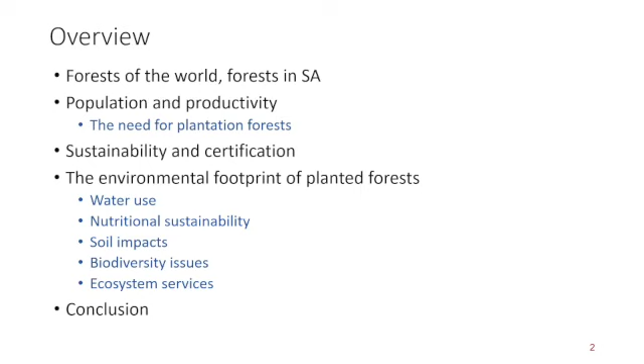I will talk about the forests of the world, particularly then the forests of South Africa, population, productivity issues of different forests, and make out a case for the need for plantation forests. And then I'll go to sustainability and certification as well as the environmental footprint of our planted forests, or plantations as they are known, and then draw a couple of conclusions.

If we start off, the forests of the world, you can see that there's a very large group of forests. Let me just get this pen focused here. Up in the north, there's a very large group of boreal forests, and over here it's known as the taiga.

And these forests grow in the extreme cold climates, mostly coniferous forests. So they are not extremely productive, but they cover a vast area of land on the planet. And then we have our tropical forests, the Amazon, the Congo Basin, West Africa here, Indonesia, etc. And they normally consist of dipterocarp trees, fairly fast growing by natural forest standards, but as we shall see, not all that fast if we don't manage them.

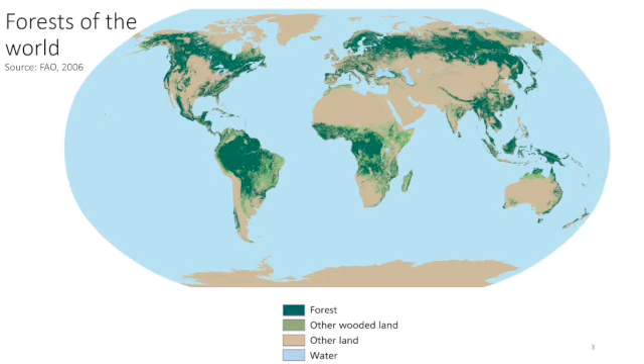If we then move on to southern Africa, maybe I should just point this out, we are very sparsely endowed with forests of a natural kind. These are the biomes we have in South Africa. And as you can see, we have a fair amount of plantation forestry that's been established in this fynbos biome over here. By the way, the purple is the only high forest that we have. And the green here is the savanna forests that we have, the dry bushveld.

But a lot of forests, planted man-made forests, have been put into the fynbos here and along the eastern escarpment of the country into this grassland biome that you can see here. So most of our plantations are then planted into either the fynbos or grassland biome, not into the forest biome, for the very reason that the forest biome is so few and far between and it needs to be conserved.

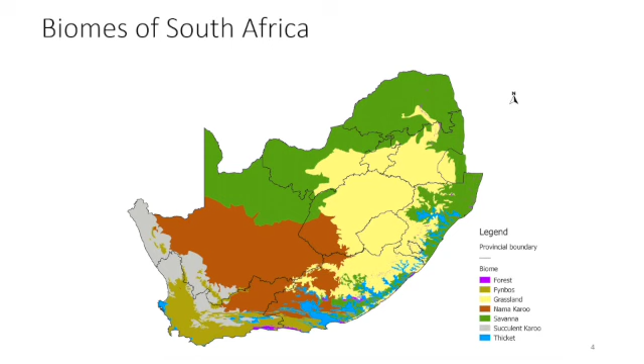So these are the kinds of forests that we then get in South Africa. At the top here, you see the typical savanna. If it gets a bit denser than that, we will call it a bushveld or a woodland. But that's typically what it looks like. There's a grass component, there's a tree component. It's not a continuous cover forest. Over here in the middle, we have the high forests. This picture then taken near Knysna. And that shows you indigenous species in a complete canopy cover situation.

And in the bottom here, you can see a typical pine plantation. Eucalypt plantations don't look all that different, established in a grassveld area in this case, but with very vast areas of grassland in the background here, in the middle ground, that have been left unplanted. Those are our so-called ecological corridors that I will speak about a little bit later.

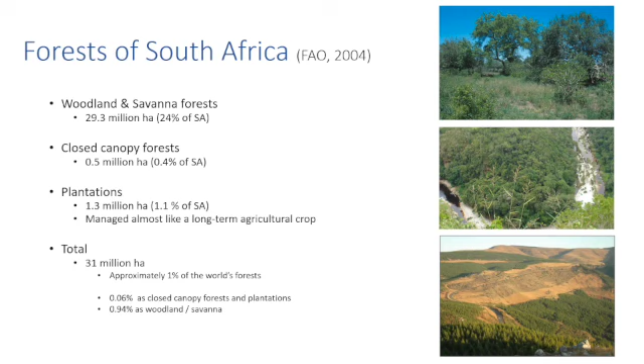So you can see that these middle and bottom categories cover very small areas. It's only the woodlands that cover about 30 million hectares in South Africa. The closed canopy forests of the Southern Cape and the Eastern Escarpment, 500,000 hectares. Plantations, 1.3 million hectares. It's not a lot, but then this is really the bread basket, so to speak, of our industry. Let's call it the fiber basket. So on a world scale, we've got 0.06% of the land area that has closed canopy forests and plantations. And the bulk of that, as you can see, is in woodland and savanna, which mostly supplies things like firewood and fuelwood in our context here.

Then if we go to the forest productivity to serve human needs, as you all know, our population is increasing all the time. And let's just look at a couple of natural forests. If you start with a boreal forest, those very far northern forests, much less than 1 cubic meter of wood is laid down per hectare per annum. If you go to the Tsitsikamma, that number comes a little bit closer to 1, but still a little bit short of 1. If you go to a place like the Amazon, which is the highest productivity, it's about 2 to 5 cubic meters of timber laid on by all the trees collectively in 1 hectare in 1 year.

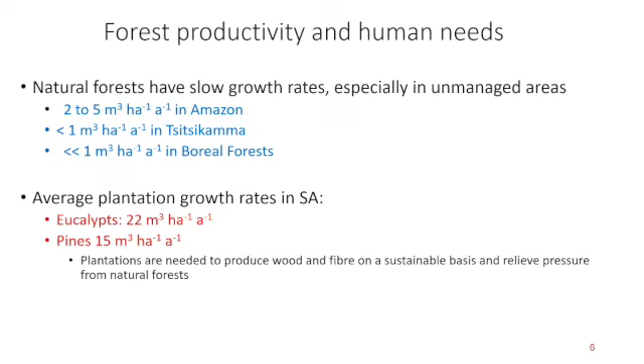If I now put that to you, that the average plantation productivity in South Africa, which is a fairly dry country by international standards, is 22 for eucalyptus and 15 for pines, you can clearly see that it's at least 3 times, and in some cases 10 times as productive as some of these temperate zone natural forests. So we really need the plantations. We need to grow a lot of timber in a very focused and high productivity way. Otherwise, we will need vast areas for it, but we would rather grow it fast on a few small areas, as we are currently doing.

So what would be the reasons for very high plantation productivity? The first thing here is that most of the species came without their natural enemies. That helps a little bit, but it's not everything. Then we've gone and selected the most superior provenances of each species. For example, we would go to Mexico and select the best pines there, and go to Indonesia and Australia and select the best eucalyptus there.

And then even breed them a little bit further in a genetic tree improvement program. And if we then deploy those trees, they grow quite fast because they're the cream of the crop. But not to forget that we farm quite intensively with trees by forest standards. So we do very intensive silviculture.

We prepare the soil, fertilize it a little bit with very low level dosages, but nonetheless we fertilize, as most man-made forests, most indigenous forests are obviously not fertilized. And we match the right species to the right site and the right hybrid to the right site. And then we prune these things, we thin them out when necessary, and we do fuel load management and weed management and so on. So all in all, a fairly intensive silviculture that leads us to a fairly high productivity.

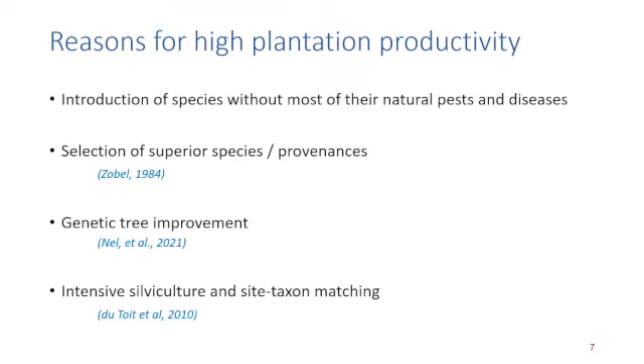And so I think now we need to talk about sustainability. We hear so much in the media about trees having a very negative impact on the environment, and a lot of people like to say a lot of negative things about trees in the popular press, often not substantiated by facts. So let's look at some of the facts around sustainability. When did the concept of sustainability start?

There was a guy in Germany with the name of Carl von Carlowitz. Already in 1713, he introduced this concept of sustained yield. In other words, never to harvest more than what is possible for the forest to regrow in the same period of time. So if you have an annual harvest of X cubic meters of timber per hectare, then that amount of timber must be able to regrow again in that same year. And that made sure that we never depleted the growing stock. So this very firm sustained yield principle was already implemented in the 1700s.

And quite correctly, it makes forestry the first sector in human society to discover and implement the concept of sustainability. Other people did this since the 1970s. So sorry to say this, but forestry did it long before it was cool.

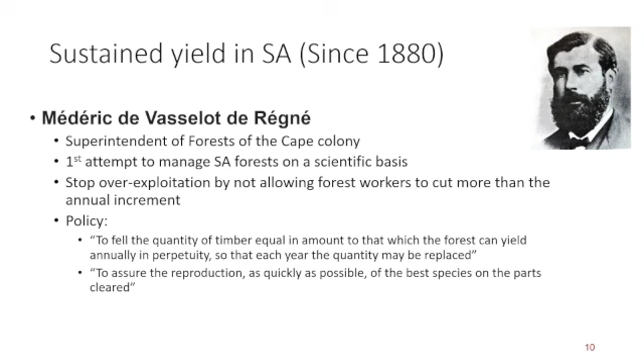Let's just say you're causing erosion in the soil or nutrient depletion, but you just plant a better genotype, you may be able to cover for yourself and not notice that the actual soil upon which your plantation depends is being degraded. So for that reason, we came up with this triple bottom line. We must maintain the environmental quality and the resource base on which it depends. So we cannot unsustainably harvest the forest, but we can also not deplete the soil, pollute the water sources, or mess up the biodiversity completely. We have to look out for all the environmental quality indicators.

Secondly, we have to provide products and services for human needs so that we can enhance the quality of life. And thirdly, it must be economically sustainable and viable. If we meet that triple bottom line, we feel then we are truly sustainable and not just practicing sustained yield. What would make a plantation unsustainable?

If we erode the soil, if we deplete nutrients in the soil or deplete the organic matter contents of the soil so that the biological processes can't happen anymore, if we have very bad environmental impacts, for example, soil compaction or something like that, if we deploy a very weak or inappropriate genetic base, we will open ourselves up to pests and disease attacks, as the next point shows. If we have very poor management, we will drop in productivity, and that will lead to the next point here, which is non-economical performance.

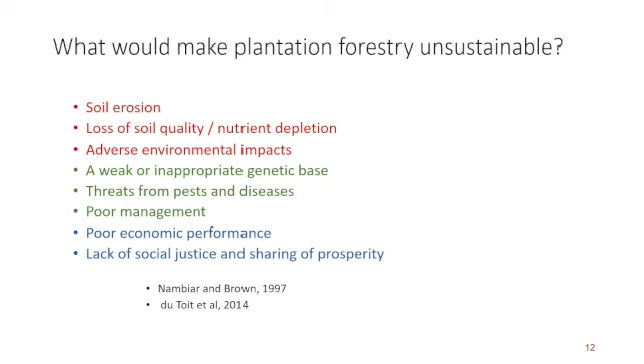And if we exploit people in the process of growing trees, of course, there will be no social justice or sharing of prosperity. And these things all should be avoided. So it's a couple of these myths that forestry is involved in these issues that I would like to dispel today with facts. And that's why I have started this subtitle, to look at plantations and their environmental footprint.

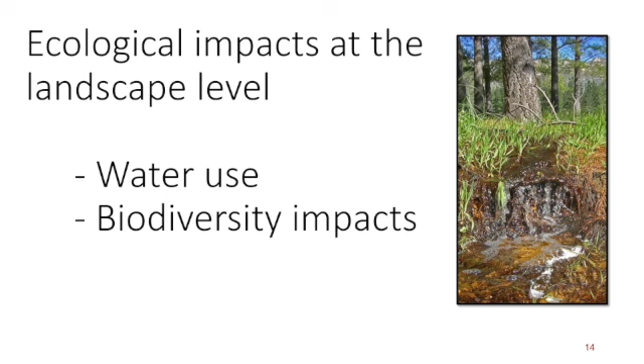So let's just look at things at the landscape level. Several things have to be managed at the landscape level, and one of these would be water use and biodiversity. You cannot just manage that on a compartment level. You need to manage that on the whole landscape level. Let's look at a couple of results that were obtained with modeling plantation water use.

Excuse me for a moment.

That is stream flow reduction patterns caused by afforestation. What people did is they used this Acocks veld type that was known at that time. Now we have Mucina's veld types as well nowadays, but in those days that was the only veld type known. So it was, let's say, a Themeda grassland type of veld type.

They used different soil depths and different soil textures, looked at an area where the stand age is corresponding to the median stream flow reduction, because when a stand is young and you plant it, it uses only a little bit of water. When it gets mature, it uses more water. So they used the median, and they presumed 100% afforestation.

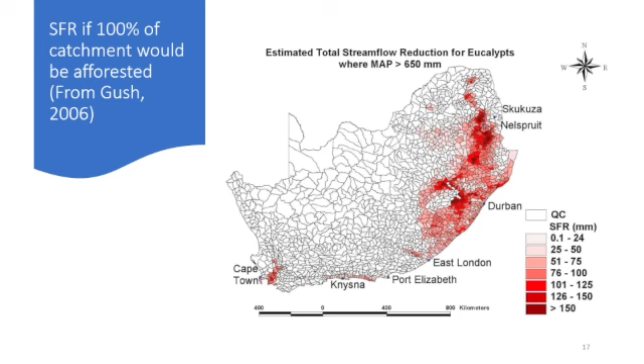Another little piece of very good scientific research that you will never see in the media is the water use efficiency. This was done by Mark Gush and Peter Dye, two very respected scientists working at the time for the CSIR, and they looked at the grams of wood produced per liter of water transpired.

And as you can see here on the right-hand side, we've got several indigenous species that they used as controls. And then all these solid bars over here are plantation species. Now, most of them, pines and eucalyptus, there's quite a variation depending on the provenance, but we usually choose obviously the ones that are more water use efficient in our tree breeding experiments. And so you can see some of these trees use water up to 2 or 3 times more efficiently than most of our indigenous species.

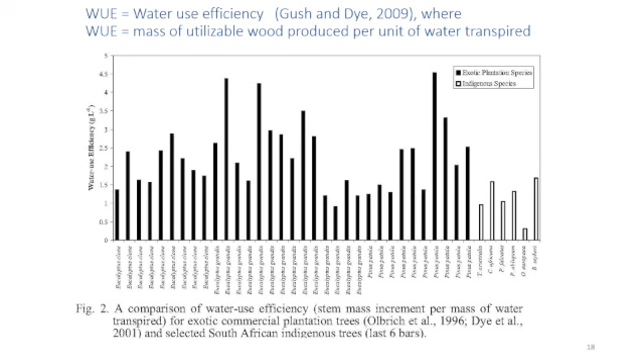So they put on more wood per liter of water transpired than any indigenous species tested to date. So we are getting more bang for our buck by planting these trees because we've selected them like that. We've selected the best provenances, and then we bred them even further to be highly water use efficient. There's no surprises here.

Then what about biodiversity? Is forestry having a very negative impact on biodiversity? The first thing that is very important is that it has to be done at the landscape scale. And the way to do it is with these ecological corridors and ecological networks. In other words, leaving vast areas unplanted, as is shown here. Around this wetland, there's a big node of grassland. There's an afforested patch here.

Then there's another corridor here in the foreground where animals can freely roam, and you can still conserve your biodiversity, even though inside the compartment, you've lost some biodiversity. But on a landscape scale, you've often stayed the same or even gained.

Conservation officials that studied the forestry areas have concluded that these areas inside forest-owned land are refugia for threatened plant and animal species. So definitely because they are well managed, all sorts of poachers and other people who could negatively impact on the ecological quality of this landscape are being kept out. So where there's good management, there's good ecological consequences.

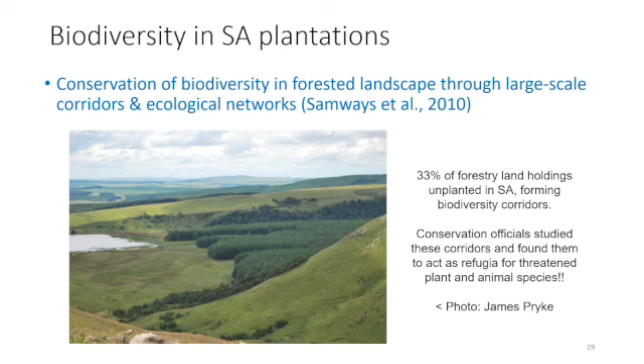About 33% of all forested land in South Africa is actually unplanted. In other words, it keeps the indigenous species. Here you can see some more examples. Around a stream corridor, here in the foreground and in the background, that area has been burnt to also provide niche sites for certain biodiversity areas. Here we've got animals roaming around on these ecological networks. And in some places, Mondi has even got elephants in the plantation.

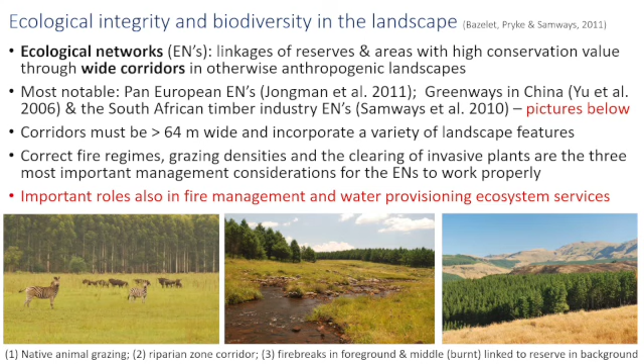So these ecological networks that are linkages between areas of high conservation value are so well recognized that they are counted among the 3 most notable in the world: the Pan-European Ecological Networks, the Greenways in China, and then the South African Timber Industry Ecological Networks, as you can see them here. So we are doing the right thing in terms of conserving biodiversity in forestry.

What about invasiveness? And here it is important that we look at 2 different issues. Invasive trees that were brought in to stabilize the drift sands at the top here. This has got nothing to do with forestry. This was a conservation operation. A lot of these Australian acacias were brought in that could fix atmospheric nitrogen and seed themselves. They have become a pest.

But the good news is that with biological control, almost all of them have now been brought under control. With biocontrol, I mean they have imported pests and diseases that predate the seeds and attack these trees so that they don't spread so much seed anymore. So slowly this battle is being won.

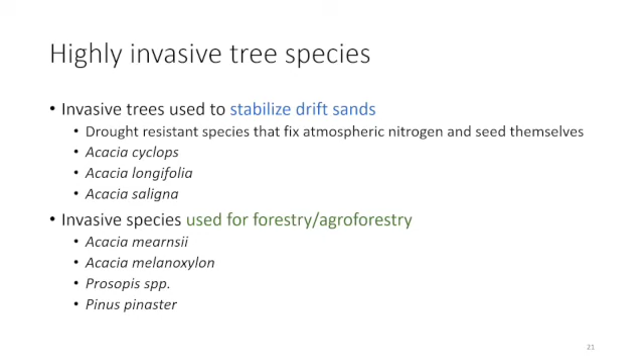What about the invasive species that we still use in forestry and agroforestry? There's a couple of them here. To give you some examples: Pinus pinaster, nobody's planting it near boundary lines anymore, again, to limit the spread of it. People are working very hard to breed sterile wattle at the moment, and so we can continue. There's a biocontrol for prosopis species. There's a biocontrol for these acacias. So we are making very great strides there.

And by doing so, we are creating a whole lot of growing stock that have very low reproduction potential, because if you plant them as a clone, if they do cross-pollinate each other, which they sometimes do, it's almost the same as self-pollination, because a single clone has got the same genetic material, and that means that they become very quickly inbred if you want to plant their own seeds.

If you want a new hybrid, you actually got to go to the good populations, cross the right mother with the right father, and propagate that vegetatively again. So now humans are in control. They can't spread themselves anymore. So that is a really big deal in terms of combating invasiveness.

And some of the species that were moderately invasive have now been phased out mostly. For example, Pinus patula. SAPPI completely stopped planting Pinus patula 3 years ago. They're only planting the Pinus patula by tecunumanii hybrid. And it grows much better, and it's not invasive. And so we can continue. There's several eucalyptus hybrids and so on. And of course, there's these biocontrol imports that also made a big difference.

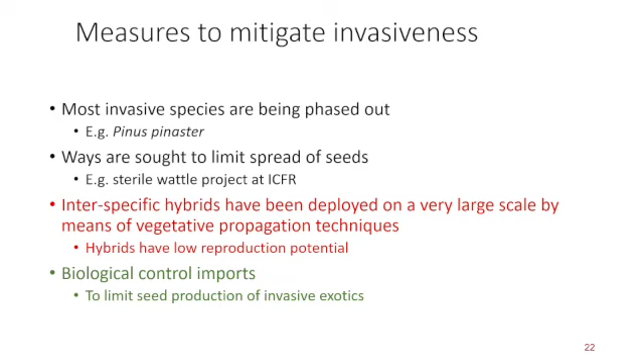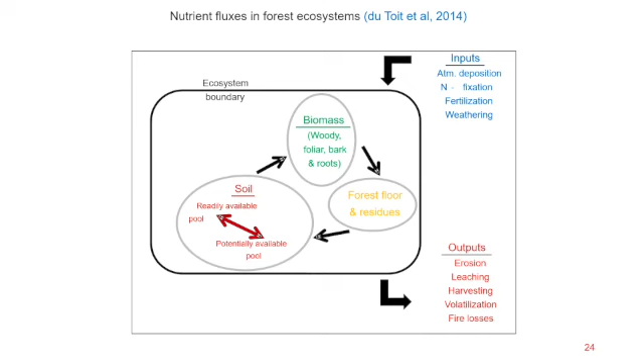So then, without laboring that fact too much, let's just look at some effects at the site level. What about nutritional sustainability and soil conservation? I did quite a lot of work on this, looking at all the inputs and outputs into an ecosystem and then how the nutrients move around in the ecosystem, followed the nutrient fluxes, made a sum of everything coming in, everything going out, and then looking at this readily available pool to see if we plot the net loss as a fraction of the available pool, what will happen. And these are the numbers I got.

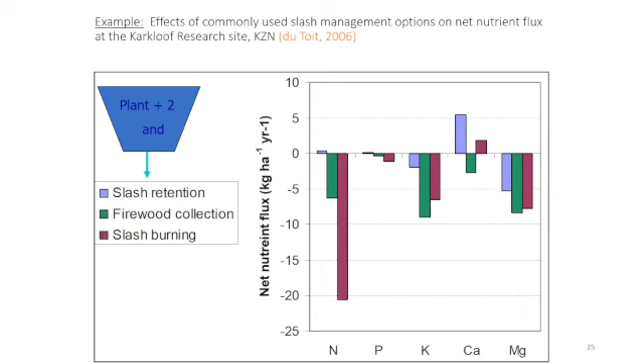More importantly is that we have gone to many sites, 28 pine and 21 eucs to be precise, and we worked out this index of nutritional sustainability that I came up with, which is the net annual nutrient loss. That's the difference between that input and output fractions, divided by the nutrient pool, and in this case, it's the readily available nutrient pool. We've shown that the pINS value then comes up, and that P is, of course, the same as the P in pH. It's a negative logarithm. So if we get values of between 1.6 and 1.8, that means we are losing as little as 1/40th or 1/60th of the readily available nutrient pool. That's not much. And remember, that pool is constantly being replenished by weathering. So it's not something to worry about.

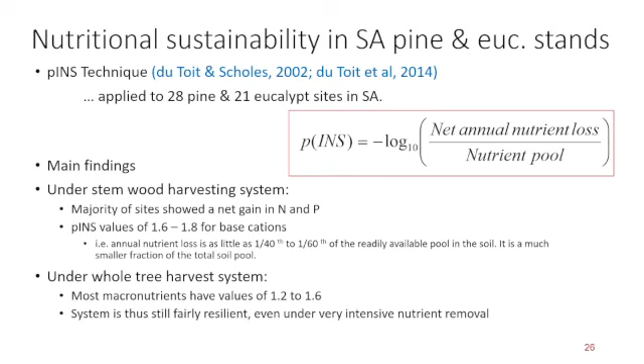Even if we do whole tree harvesting, we cannot get these systems to crash. We've got a couple of experiments that Stephen Dovey started at the ICFR, where we literally milk the nutrients off the site by doing very aggressive harvesting on an annual basis. And we could not get a single site to crash in terms of nutrient depletion. So if we manage it 10 times more intensively than we currently do, we still cannot crash it. I think you get the idea that we are not going to run out of nutrients anytime soon.

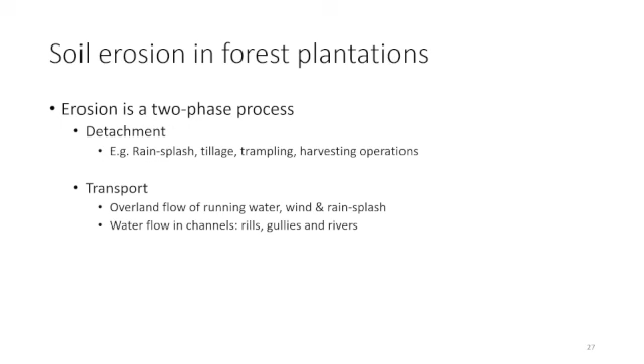The last thing, what about soil erosion? Soil erosion happens in 2 phases. First of all, you've got to detach the soil particles from each other, and that happens through the rain splash, tillage, or trampling or harvesting operations. And then you've got to transport it using wind, water, or rain splash. And then it can collect in these channels, rills, gullies, and eventually go into the river or in the ocean. Eventually. So let us just look at this very interesting work by Morgan in the UK, who did this work on various conservation practices, mostly in agriculture, to prevent both detachment and transport phases of erosion.

The only time that it doesn't cover it is if you, as the manager, literally disturb it by either burning it or raking it up or doing something silly like that, which is not the status quo everywhere. It is just done in exceptional circumstances. So most of the time we have extremely good protection against erosion, much more than agricultural people would ever have. So they are pretty jealous of our situations. If we just look after our forest floor, erosion should look after itself.

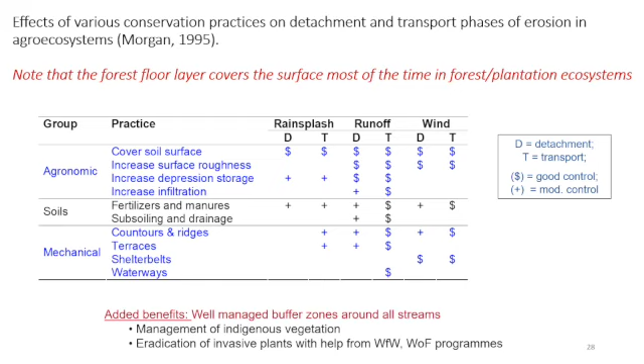So in summary, can we really afford not to have plantations? We have more and more fiber and wood material needs in the world. We have a need for carbon sequestration, and we cannot just burn fossil fuels and use energy-intensive materials all the time. Some people will say we have big impacts in forestry, but I ask you, is the stream flow reduction so bad? Well, actually it isn't. It's about 4% on average. Coupled to the fact that the plantation trees give us the biggest bang for our buck in terms of water use efficiency, I think we should continue with this situation.

In the right place. Of course, we're not going to plant trees in a place where there's a water scarce environment, but in the right places where we do have water available, we can use it very efficiently with plantations. We're having a change to non-invasive species and hybrids, and that is a game changer for that particular point. So I don't think we are going to have that many problems going forward. We use very conservative amounts of nutrients and then, of course, very little erosion. So I think to sum up, there are very few impacts. We can hardly call them impacts.

The major benefits that we can get from forests are listed here. And it goes from jobs, money, community upliftment, recreation and human well-being, climate change mitigation, and adaptation as well, erosion control, good urban interfaces. Everybody wants to go and walk or ride their bicycle or walk their dog under trees rather than in the open sunlight. We need renewable energy sources, and that forests can provide. Very good riparian zone management, again, because there is management present on these lands where forestry happens. The people who manage the forest also manage the natural areas.

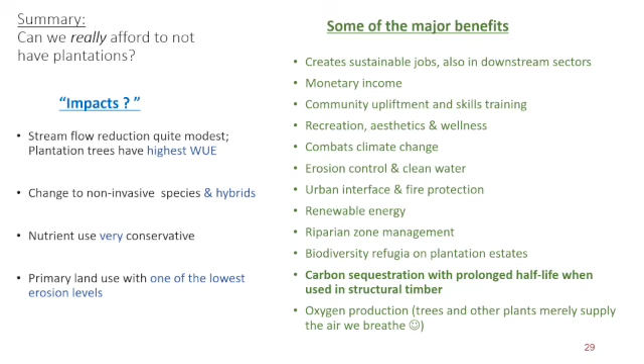As we've seen, we've got several biodiversity refugia on our plantation estates, and probably the most important one, carbon sequestration, which if we put it into structural timber and things like that, it prolongs the half-life of the time that carbon is sequestered, and that makes a very big difference in terms of bringing down carbon dioxide levels in the atmosphere. And I think lastly, it's sort of only supplies the air that we breathe from trees. So I don't think really there's a case to be made out not to have trees.

And then to conclude, the scientific facts show us that trees can be grown sustainably. It's not quite true what the popular media sometimes tell you, that trees are so terrible and they guzzle up all the water and deplete the soil of nutrients. That's simply untruthful. People are managing forests with very strict sustainability criteria in mind. And we are training young foresters to uphold this tradition. But you guys, the architects, giving instructions to the contractors, you will do very well to use more timber from sustainably grown wood and wood products from Southern African plantations, because that will be very good for our country and very good for our environment.

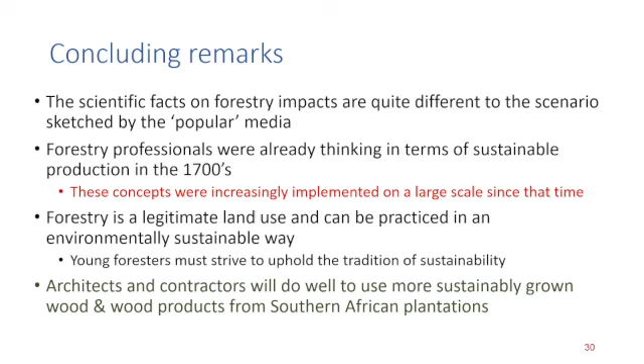I'm coming from a slightly different angle. I'm picking up from Ben, being a practicing engineer and architect in the industry. I'm going to try and tackle a different story, or build on that story, the practicality of doing this. And what does it really mean? And what I understand from architects is it's a very difficult product to sometimes sell to your client. And we want to have a look at that. What are some of the basics? What is the toolkit that you should have on your desk to help you argue and to motivate for the material?

So in doing that, I've divided the talk into 5 parts. Just a brief CO2 update of where we are, a materials overview, because we need to have a look at what materials are we using in the industry and how do we unpack all of the negative press that timber gets in South Africa, and how do we shift to more bio-based construction materials, using SA-grown timber. I'll pick up from what Ben did. And then I'll just close with some case studies, as myself in practice, what I've tested or where I've advised others to test different ways of what we can do with South African timber.

So I want you to hold this lens at all times as a consultant, that there are the 3 legs of environmental sustainability. I'm not talking about economic or social sustainability, but the 3 legs of environmental sustainability are pollution, resource depletion, biodiversity reduction. So running into the new millennium, we need to remain cognizant of those three impacts on the planet at all times, and that any action we do mitigates or has as little negative effect. In fact, we're wanting to move towards a more positive effect on the environment.

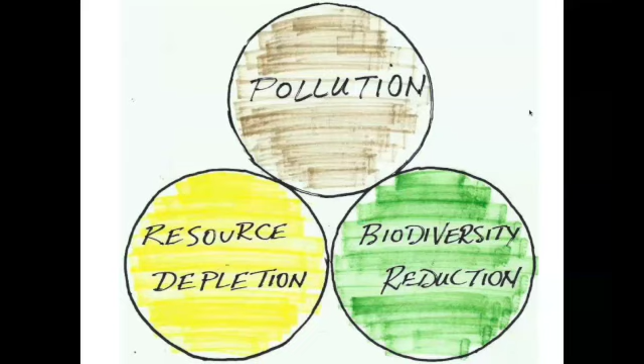And quite simply, for architects and engineers, every time you write on your drawings, you write a specification, everything we do turns into a mini economy. It affects the economy, and how we specify will affect those three things. The big one on the topic is pollution, carbon dioxide and methane in the atmosphere. But we mustn't lose sight of the other two, resource depletion and biodiversity reduction. And Ben covered that very succinctly in the previous talk. So this is a little picture, a graph.

And as life developed in the oceans, life pulled that carbon out of the atmosphere, right down to 300 million years ago, that's the Carboniferous, and it did it in two ways. So all life pulled carbon out of the atmosphere, but the biggest one was the life in the oceans, and the shallow seas were warm, they were teeming with life. They pulled out all the CO2, added it to calcium to form calcium carbonate, and 80% of the world's fossil carbon is stored in limestone. That's 80%, and the other 20% is in fossil fuels.

Now, South Africa, we don't have a huge amount of limestone, but what we're doing at the moment is we are digging out limestone and we fire it to make cement. So 60% of the CO2 that goes up in the production of cement is from the firing of limestone. It's fossil CO2. So that's why cement lime products, if you add lime to cement products, you're getting over 10% of the global carbon footprint, which is large. Interesting, animals made this product. So if you specify marble, because marble comes from limestone, it's compressed and transformed, you're actually using a fossil product.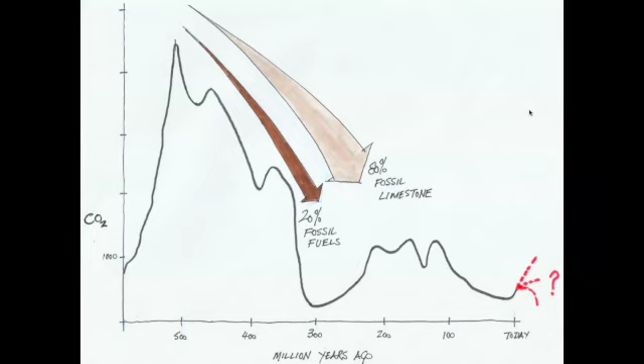The next question is material overview. Materials can only come from two parts. Materials are either mined and processed, or they're grown and processed. So everything around you, in the room around you, whatever we build, it's either mined, dug out the ground and processed, or it's grown and processed. That's it. So that's where we are sitting at the moment. And as a designer, always ask yourself that question. What am I actually using, and where does this come from?

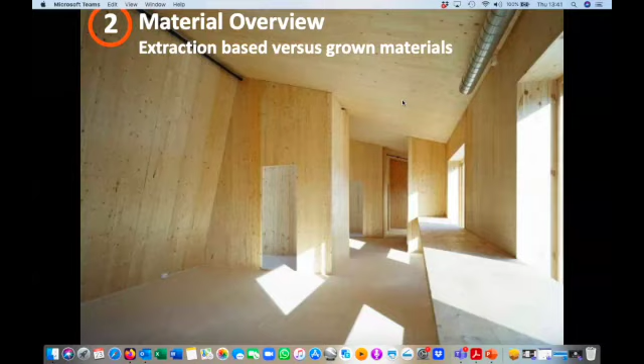No. Oopsie. Sorry, I've got lost here a bit.

Our population is going to go up to, they say, 9 billion, maybe just over 9 billion by 2040. But the problem is the growth of megacities, and Africa and Asia is the problem. So with these megacities, at the moment it's business as usual. 99% of buildings are still being made like they were in the last century. And the whole system of how we teach and do things from the last century prevails. And the philosophy of the last century was the planet has no limits. The new paradigm we're in is the planet has limits, and that's where the biomaterials come into being. So that's not a good graph.

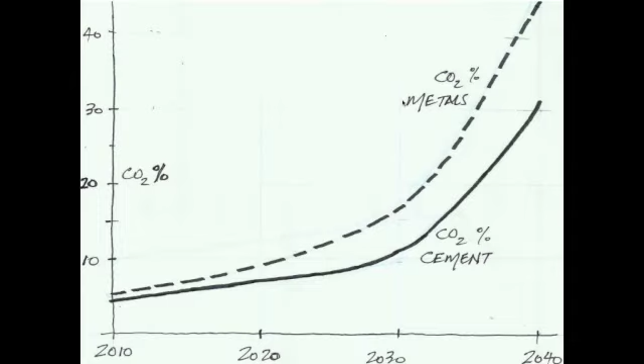I have to add, there's a lot of new technologies coming. This all depends, and this is with what we know now. There's some remarkable technologies in carbon capture. There's some green energies coming out. We don't know where we are, but this is where we are now, and those curves are plotted on that assumption. Hopefully something can happen. Technology can come in, but this is where I think trees can do a huge part. Some figures say that trees can help between 20 and 25% of reducing that curve. So as a designer, sitting at a desk, it's important to have these 5 materials under your belt.

And if we have a look at it, we've got concrete, and this is a comparison of the kilograms of CO2 per ton of material. That's the metric. So if you have a look at that, the highest one there is aluminium. And I won't go into why aluminium is so high, but aluminium is massive. Then steel is down at 1500. We've got concrete at 850, and then clay bricks doesn't look too bad. And I put plantation at 0 if that timber that is cut and used is kept and we measure the carbon stored.

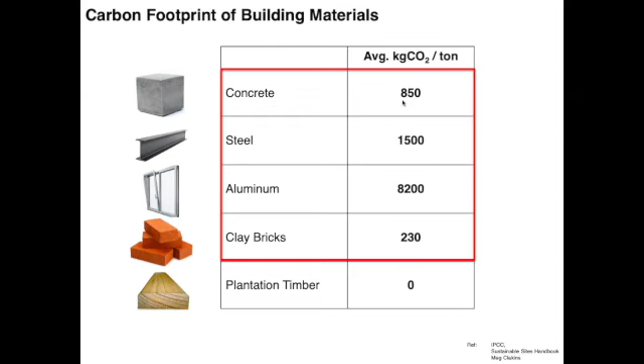Now, when you look at that, you think, okay, avoid aluminium, definitely steel. Let's see what we can do. Concrete, concrete's quite high. Let's build with clay bricks, plantation timber. In engineering, metrics tell a different story. And I'm going to swing the metrics, and we're going to have a look at these mined and processed materials. Those are the ones within the red block versus grown materials.

And I just did an exercise on a simple single-story garage. It's made of clay bricks, plastered, metal roller shutter door for the garage, aluminium windows. Your standard little garage, with just conventional materials we'd all use. Now, if you measure the CO2 of these materials in use, the whole pie chart changes completely. 50% of the CO2 of that building is from the clay brick walls, 25% from cement products and 25% from metal products.

So immediately that gets you to think. The overall carbon footprint of that little garage there is 7,500 kilograms of CO2, and that's 30 car trips from Cape Town to Lusaka in an old Toyota. So looking at that all of a sudden tells a different story. If that's timber frame, we can make major differences to that. So I'll leave you with that drawing for you to think about as we move on.

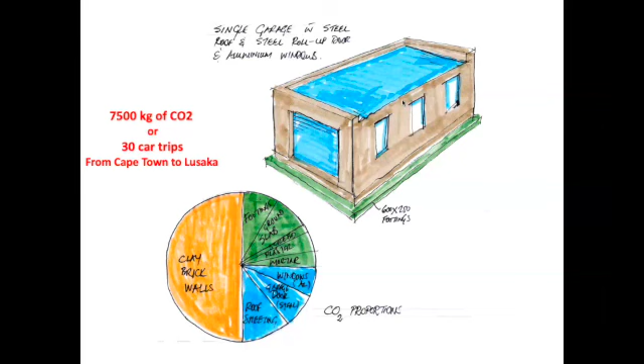So what we're facing is South Africa has a reinforced concrete, masonry, steel culture. I don't have any problem with those materials. I love them. I love using them. But right now, where we are on the planet, given that the construction industry contributes about 40% to the total global footprint, I think we've got to do something. And given the new IPCC reports, which were shocking, we've got a duty to sharpen our pencil, think twice, and adopt and adapt how we speak to our clients

and who we really represent. The concept of the client has changed. The client is no longer that person. In fact, the client is the planet, because if we don't serve that client, then we will have nothing left. So I think the days of the client saying, I want a copper roof, I want big aluminium, need to be challenged. We no longer have that luxury.

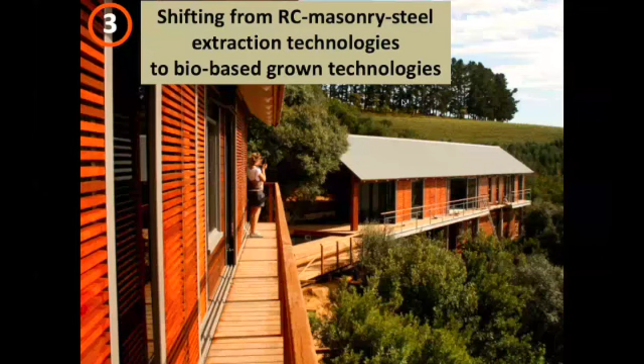So the shift would be from this masonry, steel, RC technology to bio-based grown technologies. And why I say that is because timber is the main one in South Africa, and I think there are others like bamboo that could be used. So that's the big shift. So what are some of the things? How are we going to achieve this? How do we develop this?

We already have a very small cottage industry timber culture in South Africa. There is some timber framing here and there. What's really the problem? In my work with Brunt and with Ben, South Africa could produce enough timber for a good percentage of housing in South African buildings. But it quite simply comes down to the fact that we are a reinforced concrete, steel and brick culture.

That's all. When I was in Connecticut and I went to speak to contractors and met them on site, I said, how do you guys feel about building a concrete or brick structure? And they had the same response as if you asked a brick builder here. They just don't know the material. All they know is timber. So we don't know timber.

There are some who've made timber a special interest, but the dedicated understanding of the material isn't there at all, like for reinforced concrete or steel. As an engineer, I know if you go to any reinforced concrete engineer, he or she will know everything on how to specify, all the ins and outs, all the nuances and all the problems of concrete. And concrete has got the same percentage of problems as timber has, and so has steel.

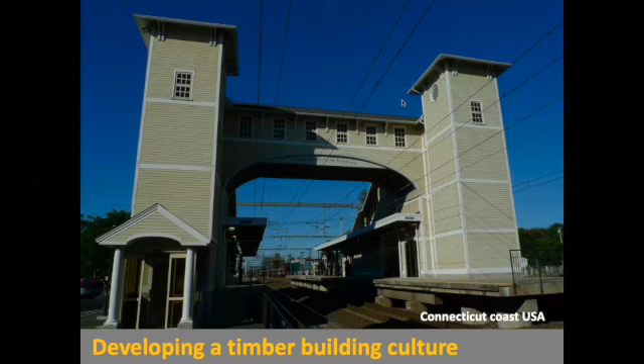A little bit more then to pick up from Ben. Lots of doubt. I mean, many engineers and architects with lots of doubt around the material. How is SA pine and how good is it? Well, it depends. There's lots of different types of SA pine, and it depends how it's been prepared, how it's been selected, how it's been treated.

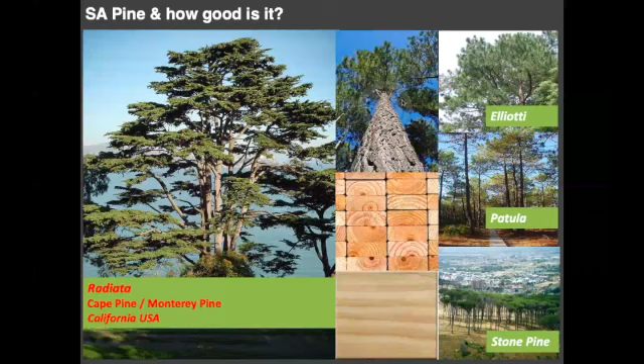That all works. But I can tell you, and I'll show my examples, I have not really had a problem with SA pine. But the knowledge around how to select and treat and design it appropriately, I would think, needs work. Eucalyptus, how good is it? And I'll show you the examples. I think we've got two fantastic materials here, and it's enough, I think, for us to do what we need to do.

At all costs, I think, if you're going to use any imported timber, I would only use it probably from the northern forests where there are sustainable plantations, in the Baltic areas and Canada and areas like that, where they have massive, big natural forests, and they replant them.

So they're in their natural environment, and they are managed sustainable natural forests, stroke plantation forests, whereas our South African ones are completely aliens, which have been managed unbelievably well. But I think that we have excellent timber, and if we go into hybrids, we will have all that we need.

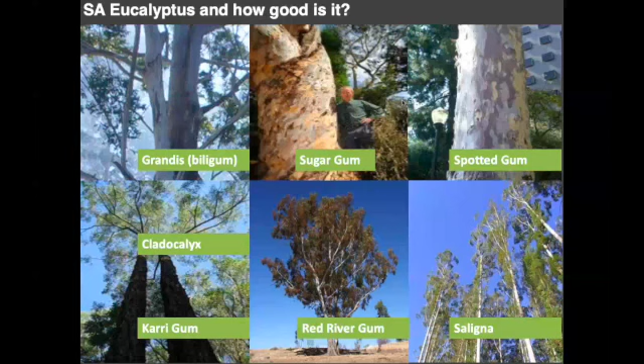I'm now just going to conclude with a few case studies. I just want to check how I'm doing for time. Yep.

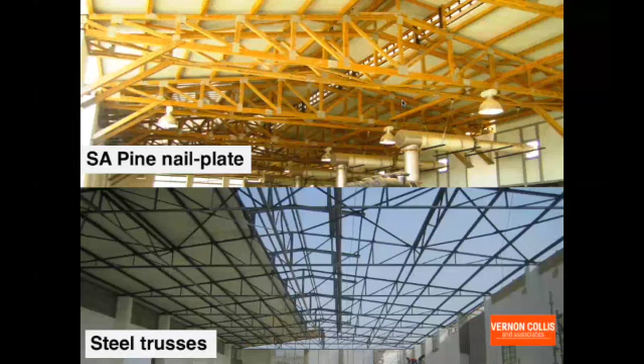These are the buildings. That facade there, the roof, all the timber that you see there is SA pine. And the internal shutters there are a laminated pine product. So the trick, I'll come back to windows, SA pine's given a very bad press. What was specified was we took grade 7, then we selected from grade 7. We let that timber sit for 2 or 3 months, and then we selected from that, but designed the windows informed by what SA pine can do and can't do.

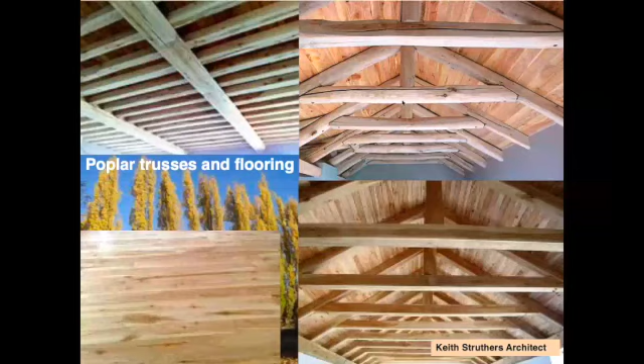I'm really concerned about this continuous specifying of balau. I've been to those areas. There's no such thing as a balau plantation. An architect specifying balau is equivalent to a Japanese architect specifying rhino horn or ivory as inlays in their tables. It's the same. And I think it's safe that any timber from the tropics, never specify it. Really, ethically, it's just the wrong thing to do.

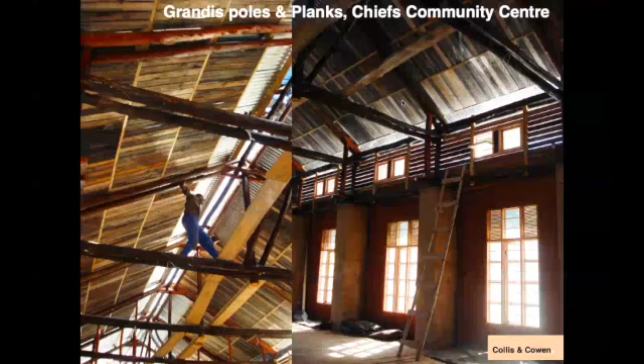This is a project in the Eastern Cape. This is Grandis. The Grandis was treated with boron. Now you can only treat the outer part with boron. You can't treat the inner core, the heart, it's too hard. That was treated with boron. And the idea was, this is the chief's building, to try and get it 100% carbon neutral. That was the challenge.

So all those brick columns there are recycled brick. We did use a little bit of cement and lime. The walls are all made from SA pine in a framework, and we used the African mix of mud and cow dung for the walls. I'm not expecting anybody to go and do this, but the challenge was, how could we get it as low carbon as possible? Painted white for windows, and that's an idea we got. We think that in this one it really worked.

The flooring, everything there is of timber or recycled bricks, SA pine windows again, and eucalyptus for the furniture. The furniture was made from all the offcuts from the planking for the building. And again, SA pine doors and windows with eucalypt cladding. And just a built-in unit there with air vent circulation, all designed, passive cooling systems, passive lighting systems.

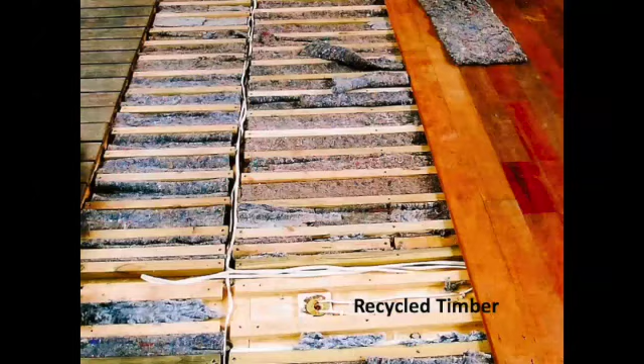This is my own office. This was an exercise in recycled bricks and recycled timber. And one of the challenges of timber is acoustics. How to get around the acoustic problem is using a double ceiling layer, and that's off-cut underfelt, which gets dumped. Whenever you get your carpets cut, all the underfelt that's cut gets put into big containers and then dumped on our dump sites. I just did an experiment to see what I could pull from a dump site to use for sound insulation.

The timber on the right is karri gum, and it's a superb flooring. I got it from another project, recycled. So that karri gum is 40 years old, and I'm sitting on it now, and it has performed well. On the top left, that timber is also recovered from a demolition project, and that was leadwood. And we got an SA pine structure, double structure to accept the insulation.

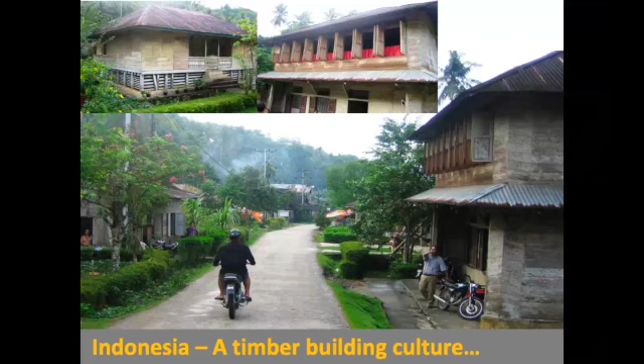This is an example of some of the work I've seen around the world. This is when I worked in Indonesia. What I really saw and understood from them, they build mainly with timber, and they design for the environment, so they do big overhangs, and they really work their structures to keep the sun and the rain and the wind off their doors and windows and off their facades because of the timber facades.

And then just to close off, there's a lot of hype around CLT. I just want to say at this point that timber is a limited resource. We don't have an unlimited amount of timber. I see some people doing single and double stories in CLT. It's overkill. We don't want to overspecify. There's no reason to do single, double, even triple story out of CLT. That's a huge amount of timber. Balloon or platform frame is more than sufficient.

I think there are times to use this material. People are using it for floors. It is hopelessly inefficient as a suspended floor. The current system that we use in South Africa of normal beams is much more efficient and effective. I think that it's been sexed up, and I think it's overdone.

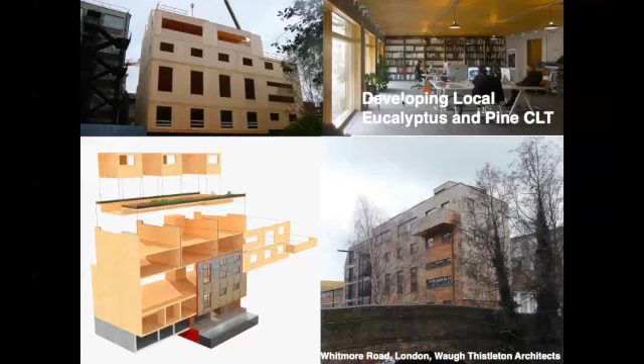It is, but maybe that's another workshop one day. Yes, it's a useful material in some instances, but it must be used carefully. There's a lot of things you can do with it. I think architects would get excited with this.

And in concluding, I think that if we shift towards this, we've got the timber. We need to put pressure on the universities and the trainings to get timber up to equal to steel and concrete. And I commend Stellenbosch for taking this baton in an attempt to make that contribution.